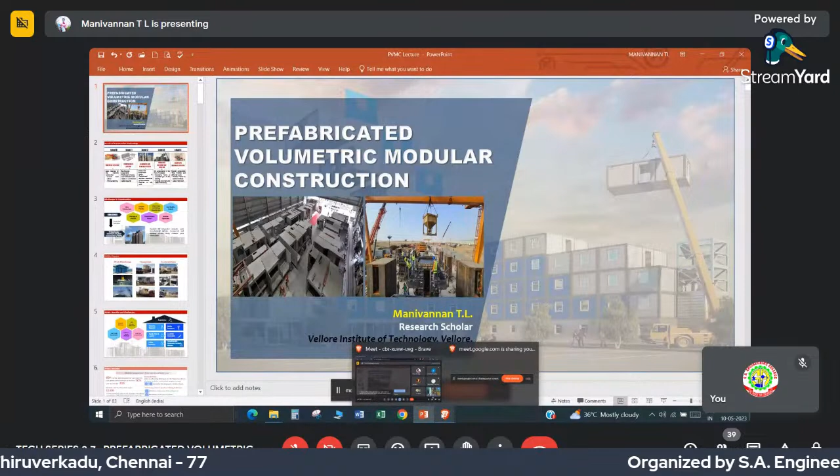So today I'm going to talk about prefabricated volumetric modular construction. To begin with, you can classify construction technology into 5 levels. The first is material system - the conventional construction technology where we bring all materials to the site and build from scratch. Then the component system is the basic prefab system where we just bring beams, columns or slabs and assemble those individual components.

Then there's the element or planar system, where long panel systems and prefabricated systems are adopted - many apartment buildings are built using this technology. The next thing I'll focus on is the modular volumetric system, in which, unlike the element-planar technology where each element is separately brought to site and assembled there, the assembly is manufactured as a whole unit called modules, and those modules are brought to site and assembled. The complete building system is the modular volumetric system.

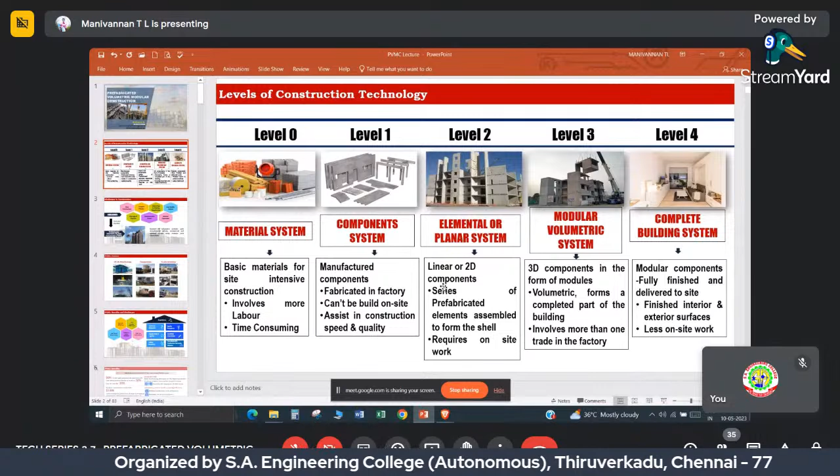There are two ways to do it. One, you can bring it as just a structural component as a module, or the complete building system after implementing all the structural finishes, MEPs, all those things. If you bring out a complete built module system, then it can be classified as a complete building system.

What is the need for this technology? We always have a question when opting for something new - why do we need it? Because there are problems with the old thing. If we talk about conventional construction, building a 10-story building takes months, because for each floor you first build the structural systems - beam, column, slab - wait for it to attain strength, then cast another floor, construct another floor, and then start giving the infill walls.

Also, if you look at quality control and waste material management at site construction, it's a very hectic task. Due to inappropriate quality control, there's a lot of material waste - cement, sand, and nowadays M-sand is also used. All these things are critical, and they also have an environmental impact.

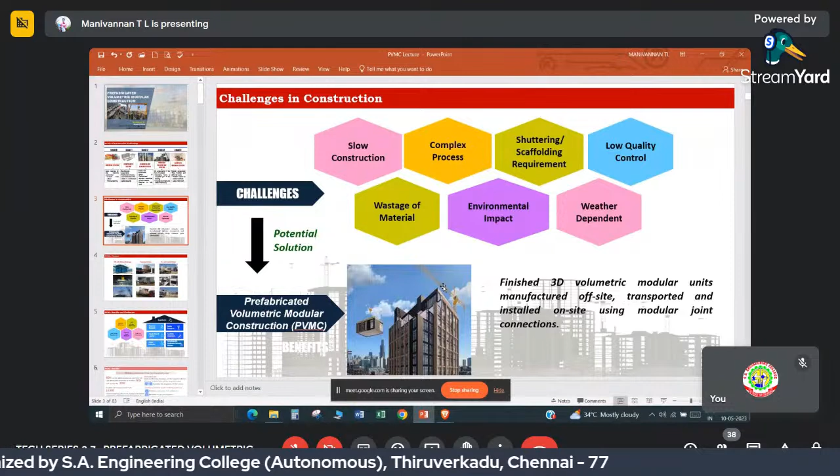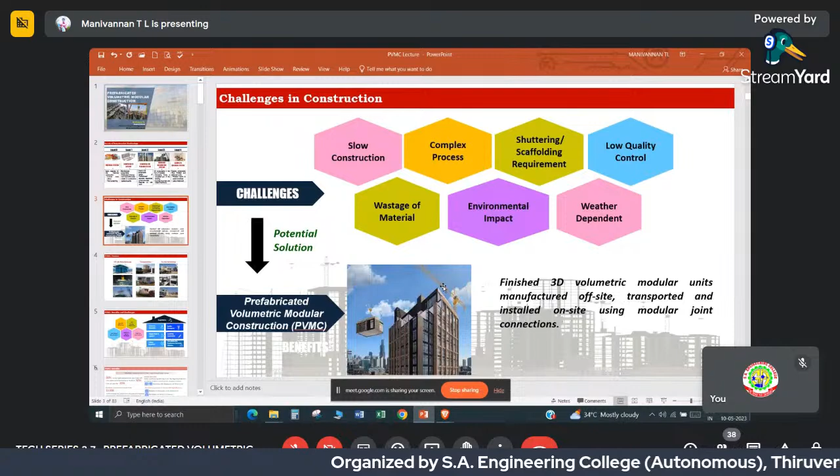So what can be the solution to these challenges in conventional construction? There comes volumetric construction technology. To briefly define it, you can say it is a finished 3D volumetric modular unit manufactured off-site and then transported and installed on-site using modular joint connections. I'll give a brief process of how it's done.

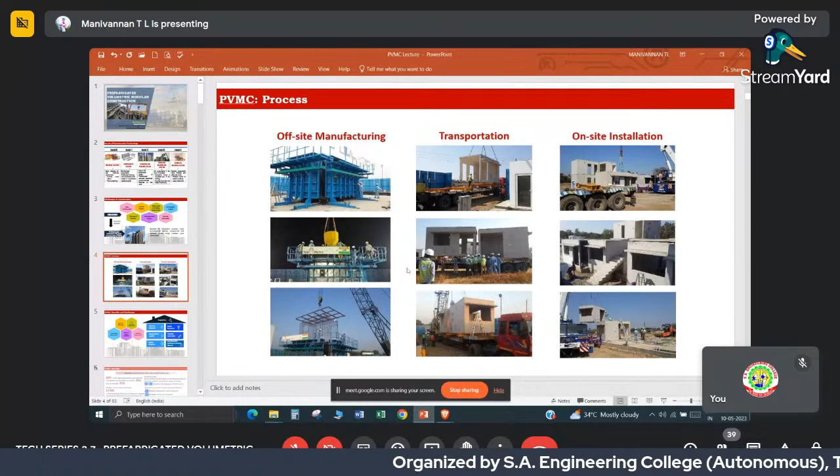If you look at this picture - there will be a shutter kind of mold on 4 sides completely, in which a rebar cage will be inserted as shown here. After implementing the rebar cage in the shutter, concrete is poured and the module is cast. After that, the shutters and scaffoldings are removed after a particular time. Then these cast modules can be transported and installed at the sites.

Now I'll talk about the benefits of this technology. This is very quick construction, very speedy and efficient. Also, looking at the workload on site, there is only assembling, and no other work needs to be done other than assembling these modules at site. Low energy requirement and optimum use of material come under quality control, because these things are done at a factory where everything is properly monitored in a restricted environment, and all material characteristics are very controlled and done with ultimate care.

So it results in optimum use of these materials and makes sure that it reduces the amount of cement wasted, sand wasted, everything. That also has a positive impact on the environment.

But if you look at this technology, there are a few challenges in it, like access to materials. In some cases, when you're going for a larger scale where you need n number of modules at a time, delivering that many modules from a far away place is a little difficult. So what they do is set up a factory kind of thing near the site and manufacture those things there. In such cases, access to materials should be available near that factory that you are planning to set up.

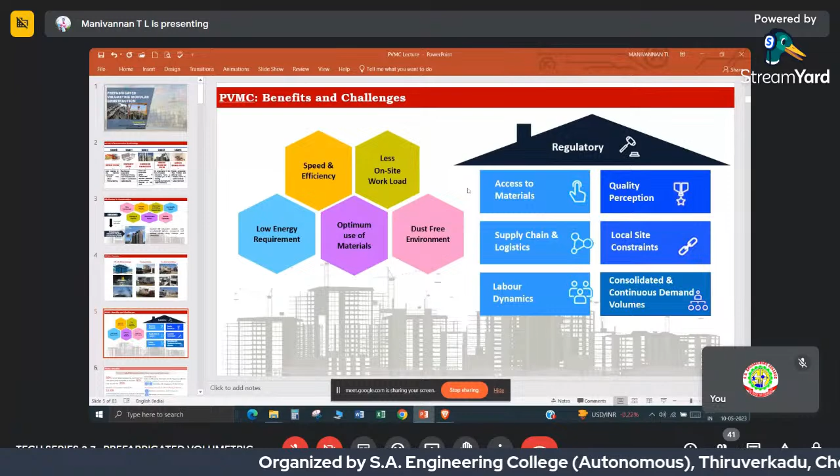Then there's supply chain, labor dynamics, all those things. This volumetric construction requires skilled laborers who are experienced in this technology so they can be involved in the construction part. Also, transport restrictions are there in this technology.

So for the features, it has economy, because per se the construction cost of one module, which is around 5 by 5 meters, will be around 3 lakhs for a completed module. For a house, it will require about 4 to 5 modules for a 600 to 1000 square feet building. So at 3 to 5 lakhs per module, it will be around 20 lakhs for a building.

Then the speed of construction. Once these modules are available at the factory, the time required to assemble them on site is very less, because you can assemble 6 to 10 modules per day. Even for a G+1 kind of building, you can construct a complete building in 2 days. For multi-story apartments and housing, it can be constructed within 2 weeks.

Then about the internal walls. The special thing in modular technology is that it's a 3D monolithic element with no beams or columns. These walls are cast along with the slab, with no other external connections. They are completely monolithic, where the wall completely rests on the slab.

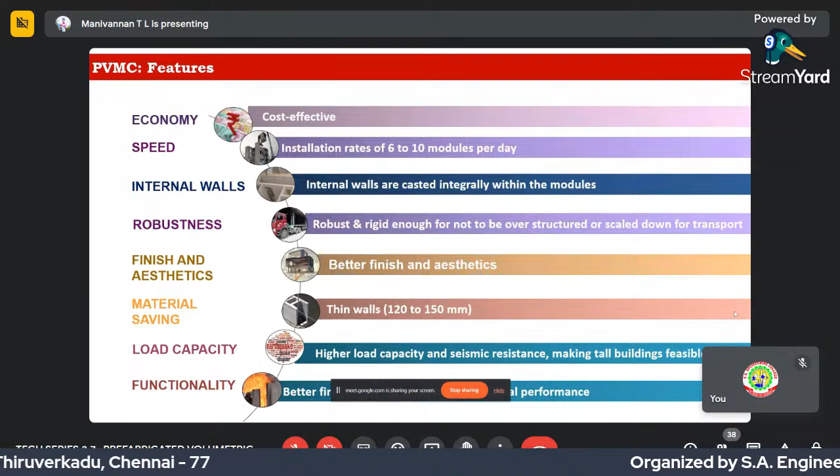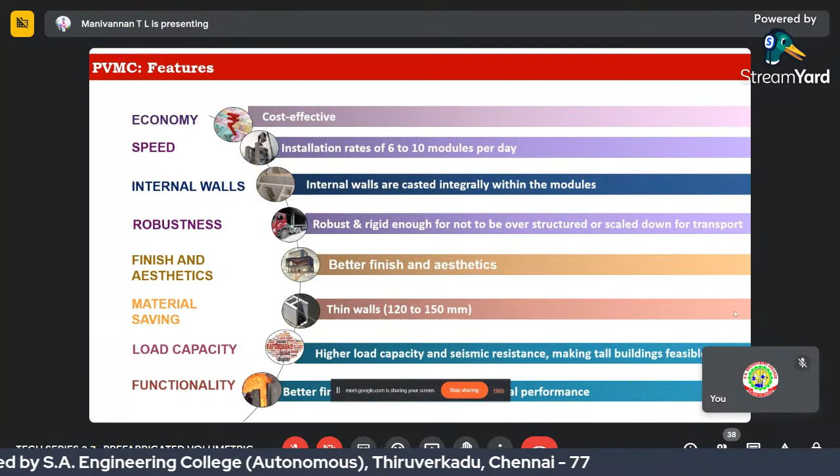Then functionality - in the design of these buildings, fire resistance is given importance in the design of reinforcement. So it has a better performance rate compared to conventional design of reinforcement, where there is less scope for fire resistance.

Regarding the materials currently being used in this technology: aluminum, timber, concrete, and steel. Aluminum is a lightweight material, but its application in concrete components is pretty much limited since the load characteristics of such components are still under study and not yet clearly defined. Timber modules similarly come with a restriction of lesser load capabilities, so they can't be applied for more stories - still only used in low-rise construction.

You could see it abroad, somewhere if you go to some tourist spots - dormitories built for 1 or 2 story buildings, which use these timber modular structures.

The mainly used technology around the world for this is steel and concrete, because these two have better load carrying capabilities. Also, these characteristics have been studied well, we know the properties of these materials better, and lots of previous works have been carried out with these materials. So moving forward, I'm going to explain about concrete modules and about steel modules.

First, getting on with volumetric modular construction with concrete. First, I would like to explain what is a concrete module. As I said before, these modules are a monolithic element. It is a complete system surrounded with 4 sides of scaffolding, and it is casted together, and there are no joints. Monolithic means it is a single structure, so it has no joints in it.

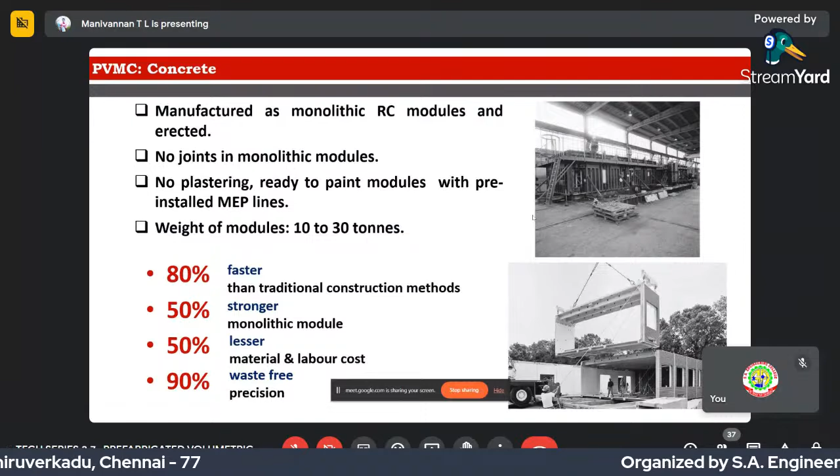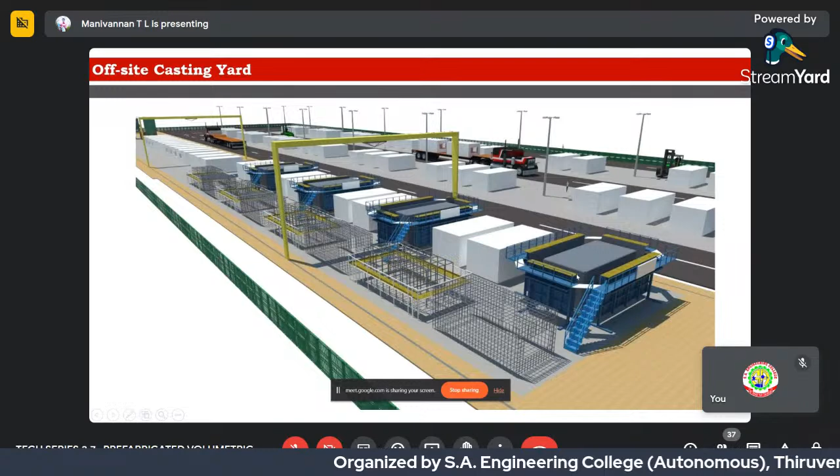If you look at the factory kind of casting, this is a schematic, pictorial view, which is a graphic generator basically, but it represents what you can see at a factory. First, they manufacture these rebar cages, and those rebar cages are installed with MEP lines, and that MEP lines are placed inside this kind of scaffolding, and then the concrete is casted. After the concrete attains its strength, that module is released from the mold, and then it is ready for transportation.

If you look at steel, majorly in volumetric construction, the steel grade used for reinforcement is Fe500, and this mesh is formed by using either welded mesh or conventionally cut and bent reinforcement bars.

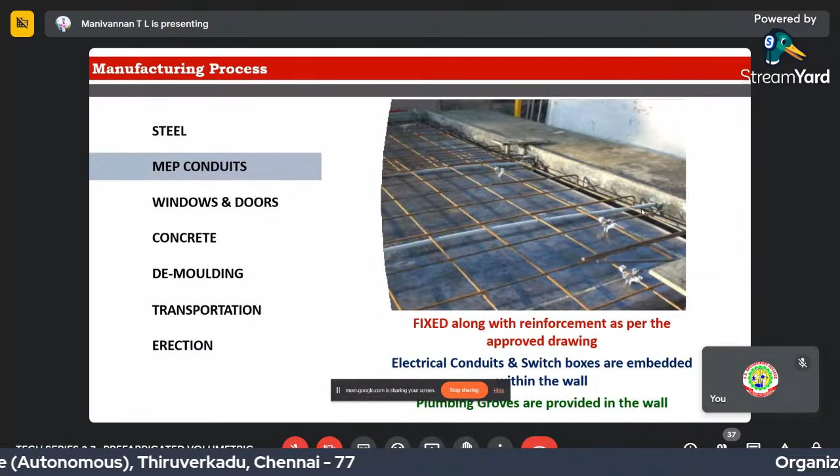Then if you look at these MEP placings along with the rebar cage, for mechanical and electrical provisions, the pipes and all those things are provided along with the rebar cage itself. For the window openings required in a room, those windows and doors openings are provided within the rebar cage like this. These openings will be provided, and the remaining portions will be gauged.

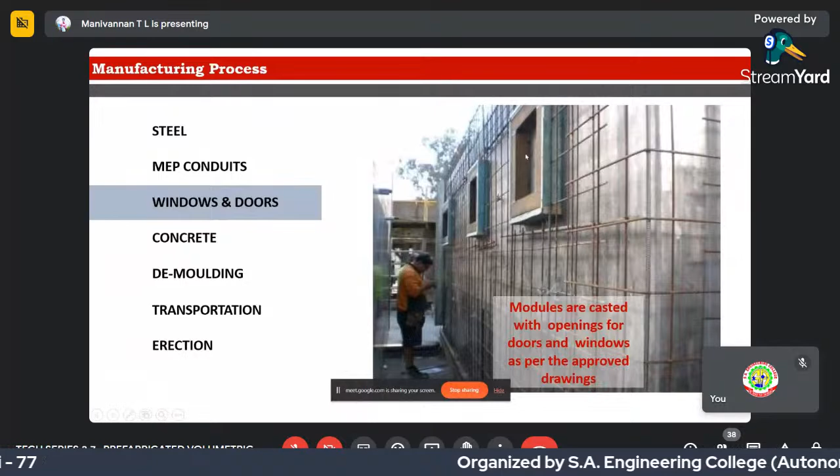Then for concrete grade, since we are going for a high strength module, the minimum concrete grade currently used in construction industries is more than M30 grade, where they go for high strength concrete, and also design it such a way that it has a free flowing rate, because it is a slightly more complex reinforcement cage, so it needs proper finishing.

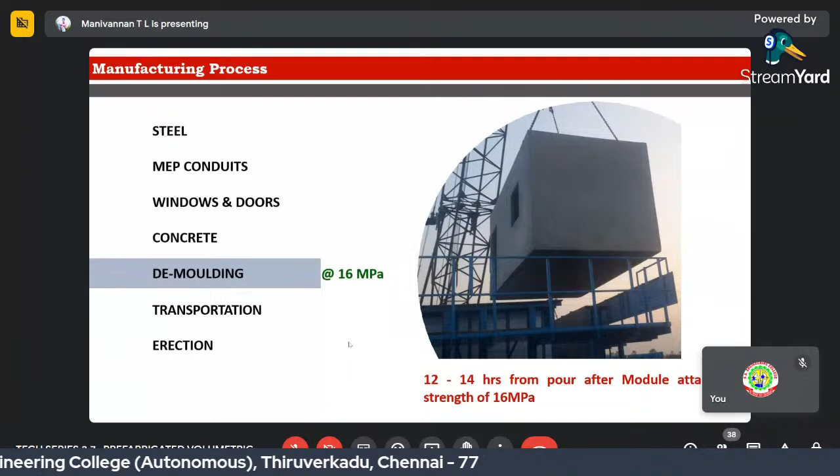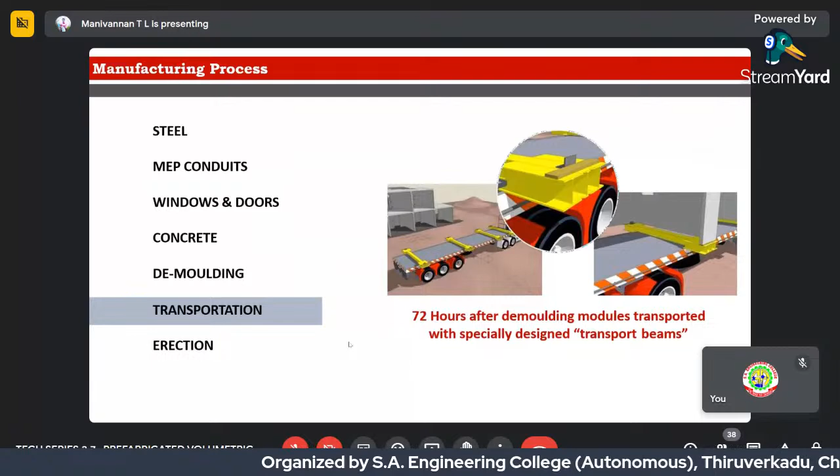After it attains complete strength by these latest curing techniques, the modules will be ready with their complete strength by 72 hours - that is after the complete painting process and the finishing process required for the module. So one module will take about 3 days to manufacture, and it will be ready to be transported.

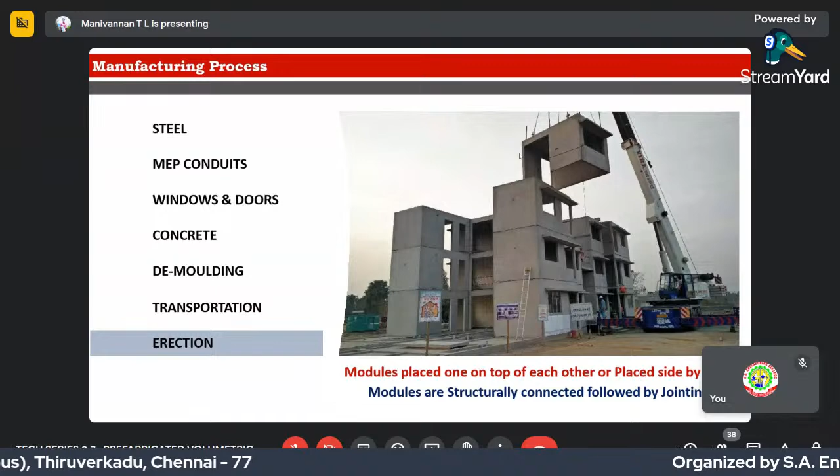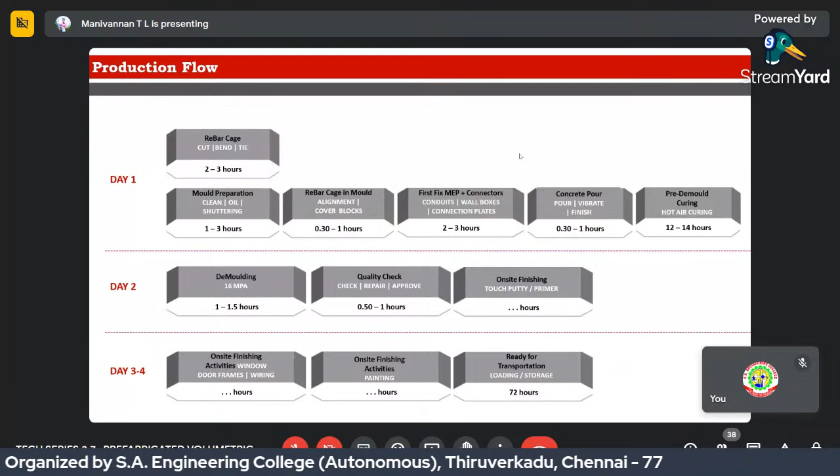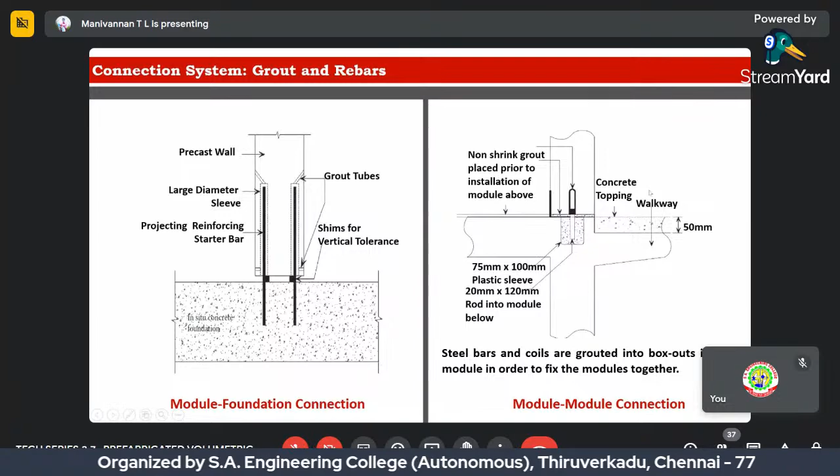So those precast units are placed over that foundation. The first basic ground floor modules will be placed on the foundation elements, and before placing, it will be properly aligned so that the projected rebars go inside and get inserted properly, and the module is aligned and placed onto steel shims to achieve line and level. That will be made sure so that there is no eccentricity between those connections.

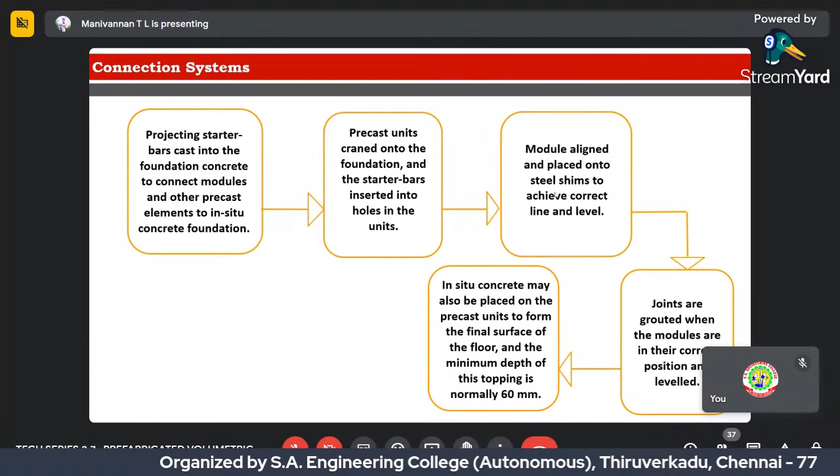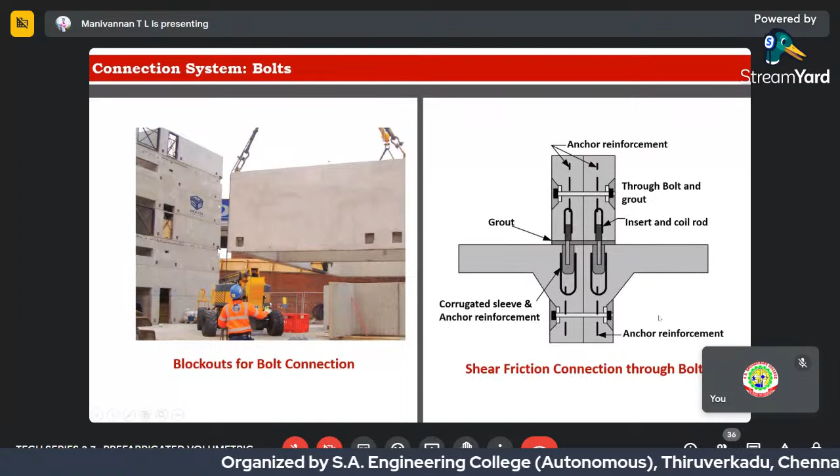Then between one module and another module, it will have a similar kind of connection. On top of one module, it will have a similar projected bar, and on the bottom of another module, there will be coupler kind of holes on which it will be placed and grouted. Also, to increase the stability of these connections, bolts are used, so that when two modules are placed together, it is also connected laterally using these additional bolts, which increases their shear strength. You can look at these pictures where holes and provisions are given, so that bolted connections are worked out outside after they are inserted into the projected rebars.

In this, it's a similar kind of connection, but here they also use a steel plate that attaches together these projected rebars. It gives better stability to these connections. These are just several advancements that have happened in these connection systems.

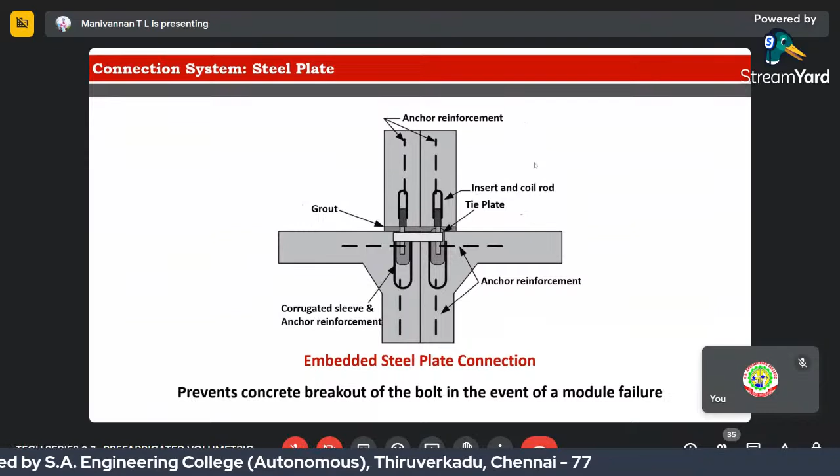If you look at the design considerations made in these concrete modules, basically we follow IS 456 for any design of beam, slab, column, whatever you say. But since this is a monolithic unit, in an actual scenario it requires a building code. The truth is, there is not yet a defined building code that precisely adheres to this technology.

So at present, the practice in the industry is that we follow existing codes for individual concrete elements, like precast floors, structural steel members, reinforcements, all those things. Each element is also designed as wall and slab separately. The Eurocode of 1992, BS 8110, and ACI 318 also discuss the connection systems needed to take care of these loads.

If you look at the Indian codes on precast elements and connection design, they basically talk about beam and column joints. They don't talk about wall-to-wall connections or module-to-module connections, so we go for British standard codes where they talk about modular connections also. So these things are followed together, accumulated together in the design process.

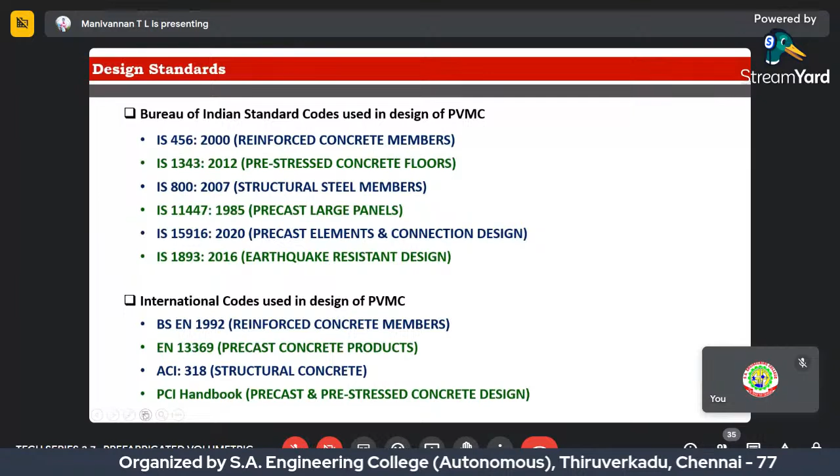If you look at the basic casting requirements, the material strength requirements for this technology, as I said before, we go for a higher strength in this technology. The material strength required is M40 or M50 grade of concrete. And at the stage of demolding, we look for 50% of strength, and then it is demolded.

Also in design considerations, these hooks will be designed, as you can see here. These hooks will also be designed in the reinforcement cage itself, so that it has the capability. Since one module weighs about 10 to 20 tons, these hooks need to be designed properly, so that they have the capacity when lifted by cranes, that they can transfer the force equally among the walls, so that no cracks or stresses occur while transportation takes place.

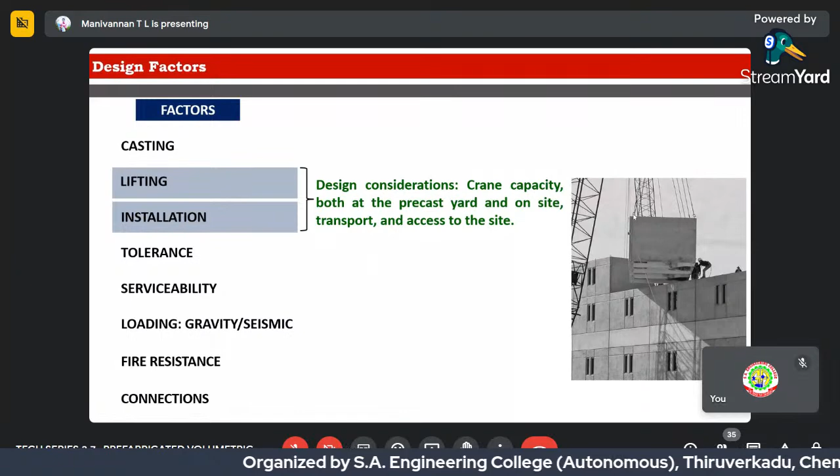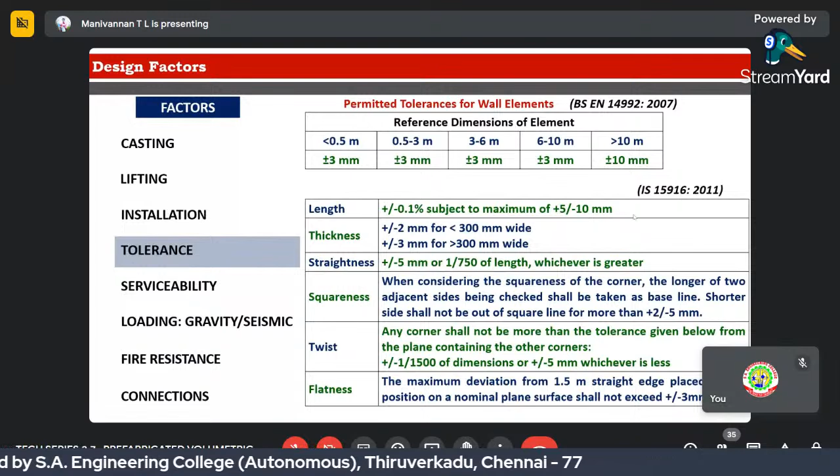And if we look at tolerance, these structural wall elements and slab elements need to have a tolerance of plus or minus 3 mm, because at site, after construction and storage, there can be slight misalignment when they are placed. So for that purpose, these tolerance limits are given. Similarly, for length, straightness, squareness, and twist, how these modules should be, all those tolerance limits for the walls are considered.

It's similar for wall, what should be the length, height, weight, width. This is just to accommodate, so that to make sure even if some difficulties happen at the site while placing these modules, that these modules are capable enough to address those challenges and accommodate it.

If you look at the serviceability factors that we considered, these modules should be designed so that the deflection under service load should be less than L by 250, and the deflection after applying complete finish, for that service load, should be L by 350 or less than 20 mm.

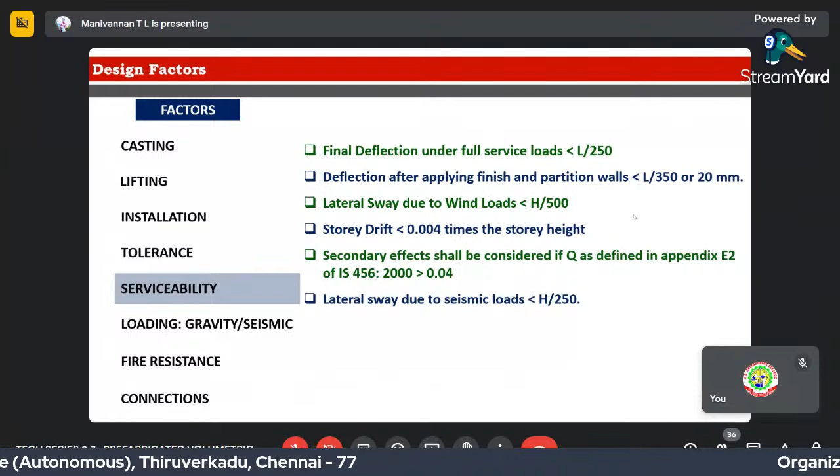And the lateral sway, if you go for higher stories and consider lateral forces, the lateral displacement should be less than the height divided by 500, and the story drift, for lateral forces such as earthquake forces, the drift between one floor to another should be less than 0.004 times the story height.

And lateral sway, as I said before, for seismic loads, for wind loads it is h by 500 specifically, and for seismic and earthquake forces, the lateral sway should be less than height by 250.

The steel bars in the module should have robust joint connections, so that in the critical zone, which in this modular technology is the connection between one module and another module, the shear capabilities and tension capabilities of those connections should be addressed, and adequate reinforcement for that required shear strength should be given.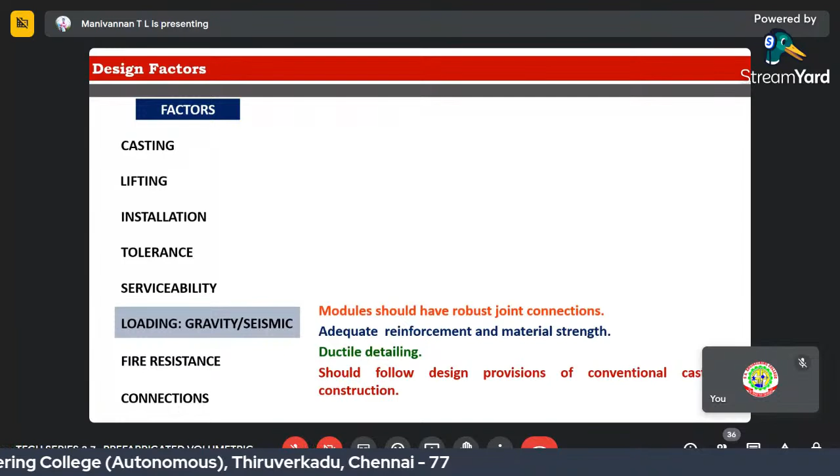Fire resistance is also considered in this design, since we follow the British code standard for this modular technology, which addresses the fire resistance needed for structural elements. This fire resistance R30 is nothing but resistance for 30 minutes, and similarly there's 60 minutes, 90 minutes, and 120 minutes ratings.

Accordingly, the requirement of your structure depends upon the location of the site. If there are adequate fire protection measures available at that location, if a fire happens, then you can have the fire team that will rescue and act along.

If it will be very short, you can go for a 30-minute rating and provide lesser dimensions in the wall element, so it is economical. If it is somewhere in the interior part and requires more time, similarly you need to give provision for that and go for a larger size of structural elements by increasing the thicknesses and slab depths, everything.

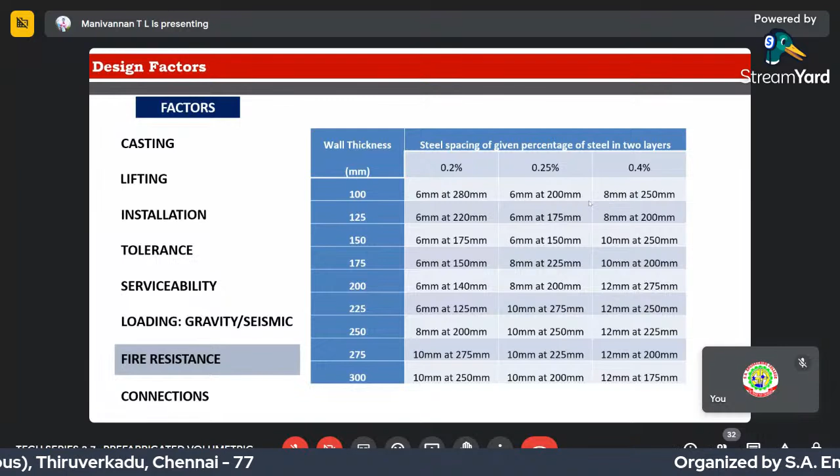This is just a model, like if you consider 0.2% of reinforcement, what will be the reinforcing bars that can be opted for these walls. And similarly, if you go for higher strength, say 0.25% or 0.4% of the concrete area, what will be the reinforcement basically required to design these walls.

And for varying wall thicknesses, these rebar details have been listed out.

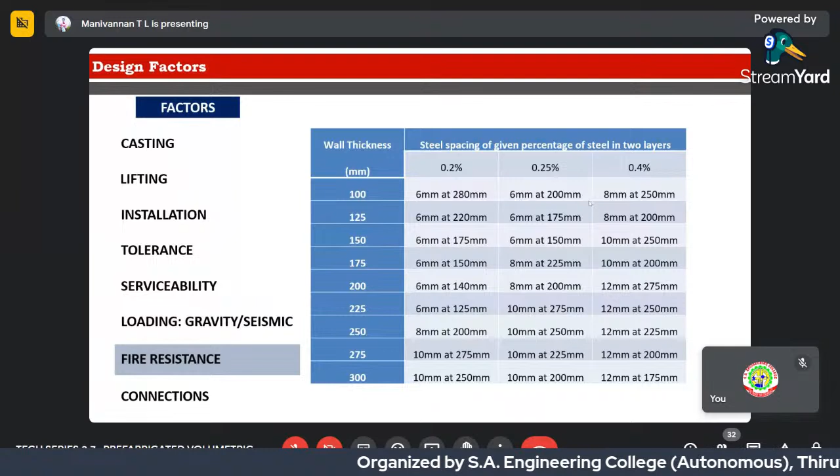And if you look at the connections, as I said before, the vertical joints need to be designed where they only talk about this keyed joint, where they have resistance between shear, which majorly focuses on RJ, which is nothing but the shear capacity of that joint. These are the few code adaptations that we follow in that prefabricated concrete code as per Indian standards.

Similarly, for horizontal joint and vertical joint: the horizontal joint is between one module to another module, between floor to floor, and the vertical joint is module to module between within the floor when you connect two other modules laterally.

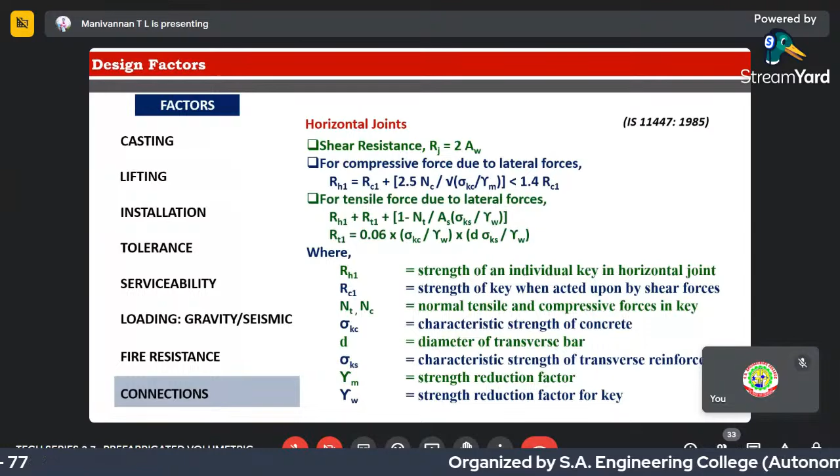And for slab, as I said before, there is no particular standard for this technology, so we go with the conventional standard slab designs that we follow.

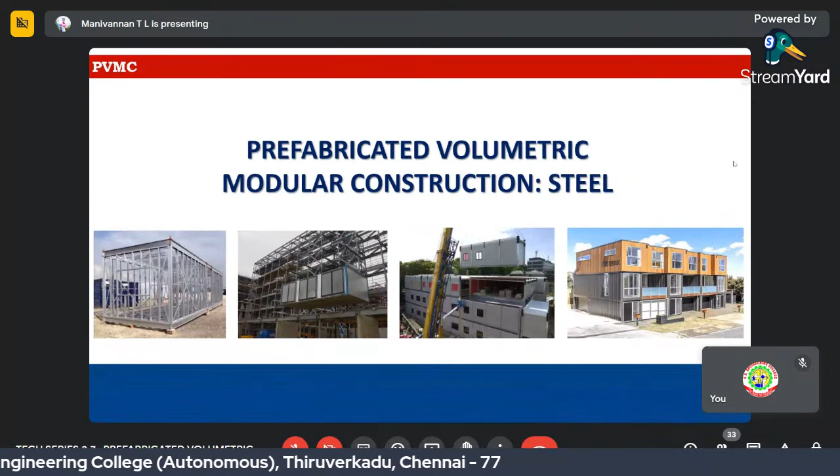So that's about the concrete part. I explained how the manufacturing takes place and also the design standards looked at in it. Now I'm going to go further about steel modules.

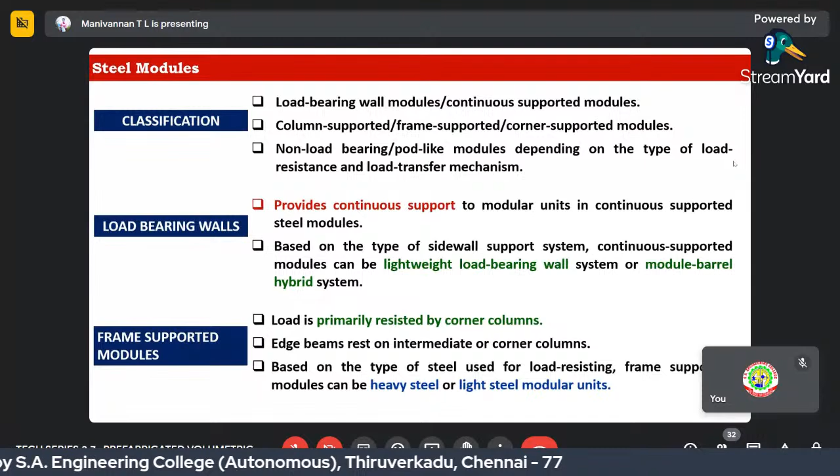The steel modules are classified into three types: load-bearing wall modules, column-supported (frame) modules, and non-load-bearing modules. In load-bearing wall modules, the steel module is completely made with walls, so the load is transferred along the length of the walls. In frame-supported modules, there are columns and beams, and the load is majorly carried by the beams and columns.

This is an example of load-bearing modules. You can see they have continuous steel sections that together form a wall, and the load transfer takes place through it.

And these are the frame type section modules I mentioned, which have only columns and beams, and the loads are majorly taken care of by the columns and beams.

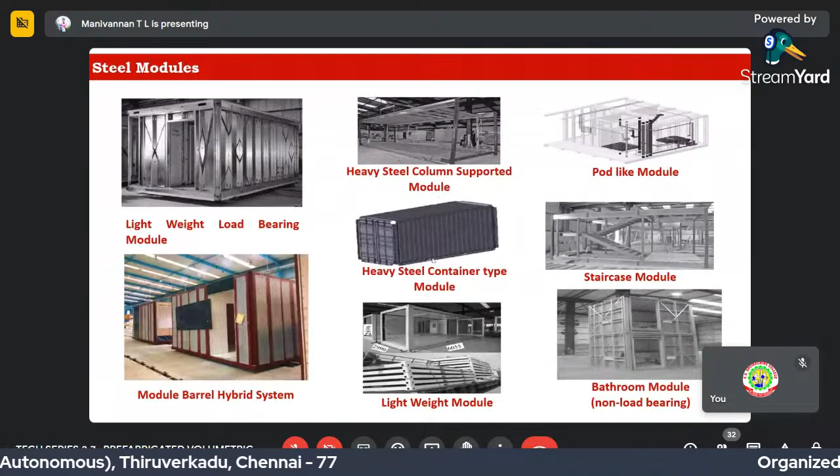This heavy steel container type of module you can see in our places too, like small tea shops or restaurants on the roadside that use these containers. They alter those containers and set up small shops. These containers can take heavy loads, so they can also be incorporated and constructed as a module, since it's similar to a four-sided wall and a slab kind of element.

The staircase and bathroom modules are non-load bearing types, which are not specifically designed to carry load from the structure but are just for provisional purposes. The load bearing capacities of these module structures, the staircase or bathroom modules, are very less.

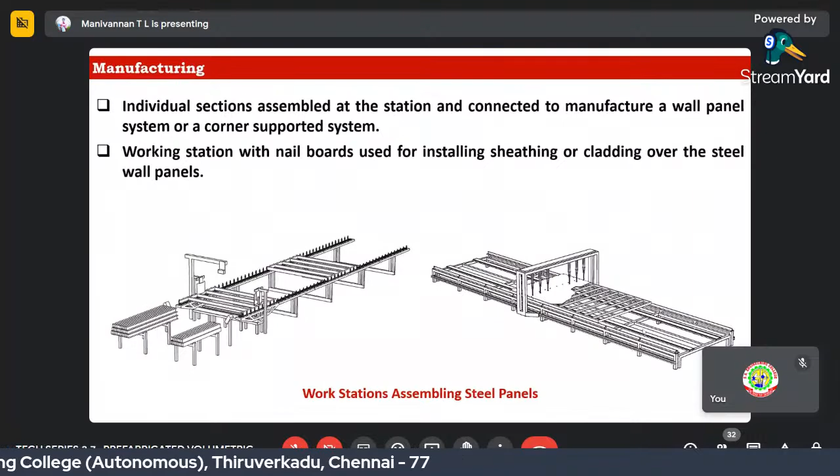Talking about the manufacturing process of steel modules at the factory, these steel modules are not like concrete modules. They have columns, walls, beams, everything, so each element is manufactured separately, and those elements are joined together, and sheets are applied to give a finish, achieving a finished wall element or structural elements.

This shows how these steel elements are used. After getting a steel section kind of structural component on the turning tables, these sheets are assigned to the steel component, and that's how it takes place in the factory.

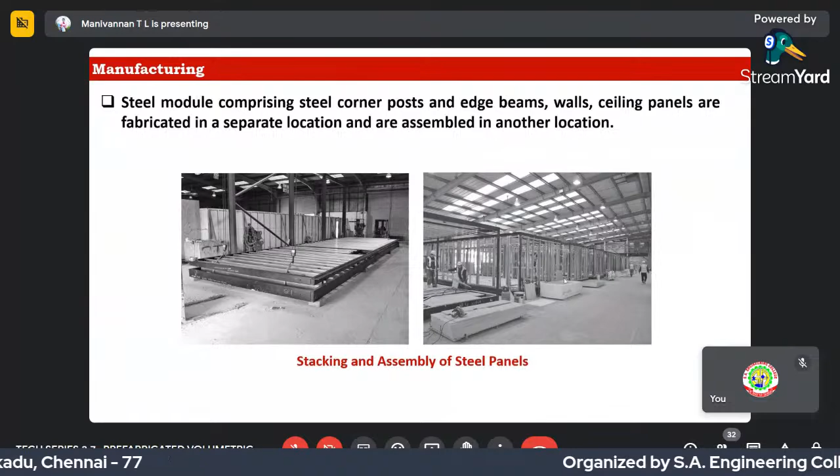Then once each wall element or column-beam element is obtained, these things are stacked together and assembled at the factory, so that it makes a complete module.

The challenge with steel is that it's not structurally stable by itself, since it doesn't have a shear wall kind of reinforcement and heavy strength like a concrete module. Since steel is a lightweight material, it has restrictions for lateral load carrying capacity.

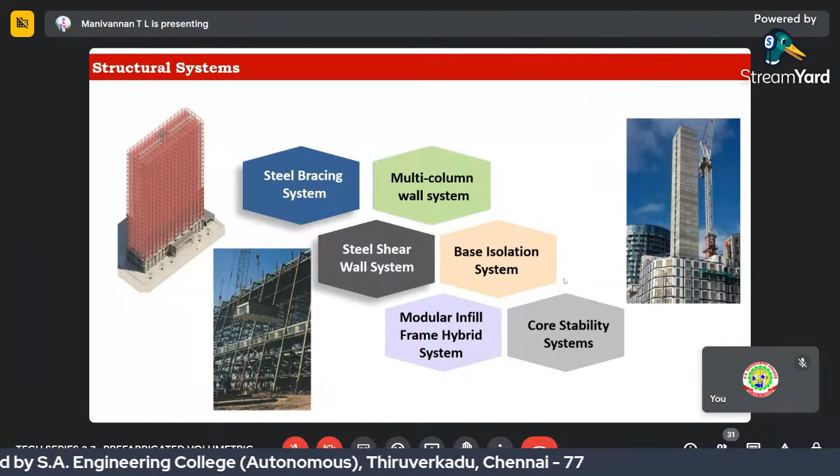So what we go for is the steel bracing system, multi-column wall system, steel shear wall system, base isolation system, modular infill frame hybrid system, and core stability. These are additional structural systems implemented in a steel modular building.

Looking at the bracing system, it's nothing but additional steel sections given from the framed module. Diagonal steel bracings are implemented, which improves the torsional resistance and increases the lateral stability of these modules.

Looking at the multi-column wall system, with just four columns it's a basic module structure, and you go for increased column sections in between the two columns, using sheeting so that it acts as one structure together. These multi-column systems also increase the load carrying capacity and stiffness of these structures.

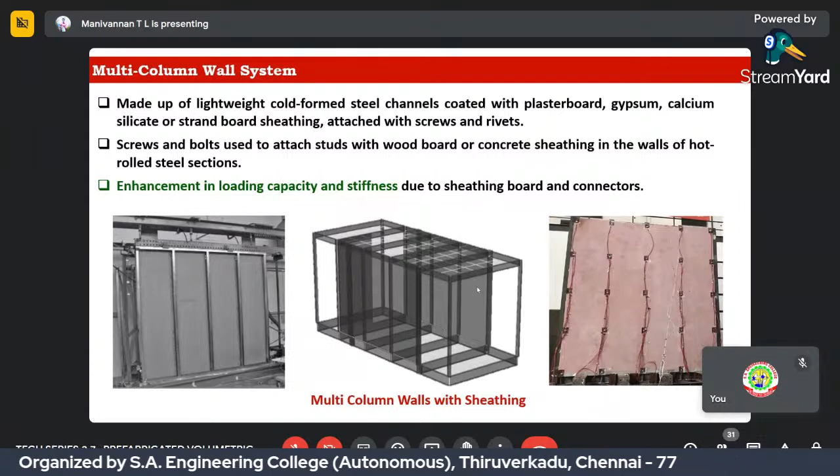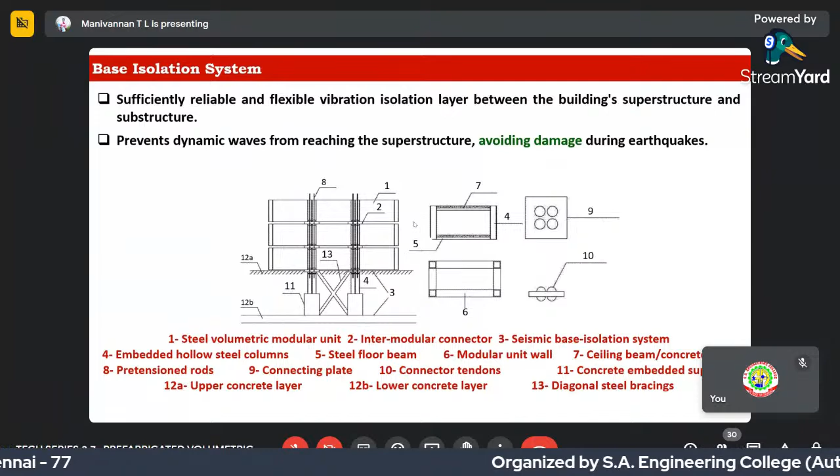Another technology is that either you can make these implementations in the steel module, or you can go for base isolation technology, provided in the foundation, which takes up lateral forces due to seismic activity, controlling the amount of seismic forces and vibrations that go into the superstructure, restricting these things at the foundation level by providing this base isolation system.

Another technology is that since steel modules are a little weak in lateral stability, you can go for a pre-constructed concrete structural system. A beam-column-slab system alone is constructed at site, and then these steel modules are used as infill materials, placed in between those slabs and then connected.

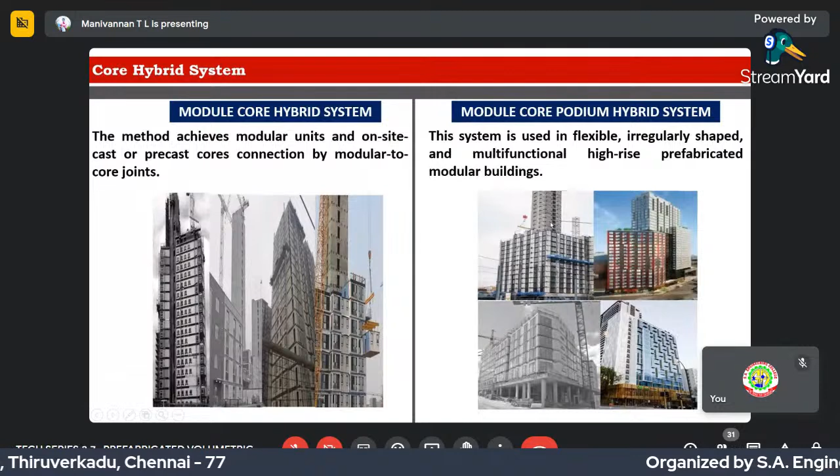Talking about core systems, this is a shear wall kind of structure, similar to a lift structure constructed in conventional concrete buildings. A shear wall concrete core will be constructed, and surrounding that core, steel modules will be attached along with concrete modules. The concrete shear wall structure and steel modules attached to that concrete core give you the complete building, as shown here.

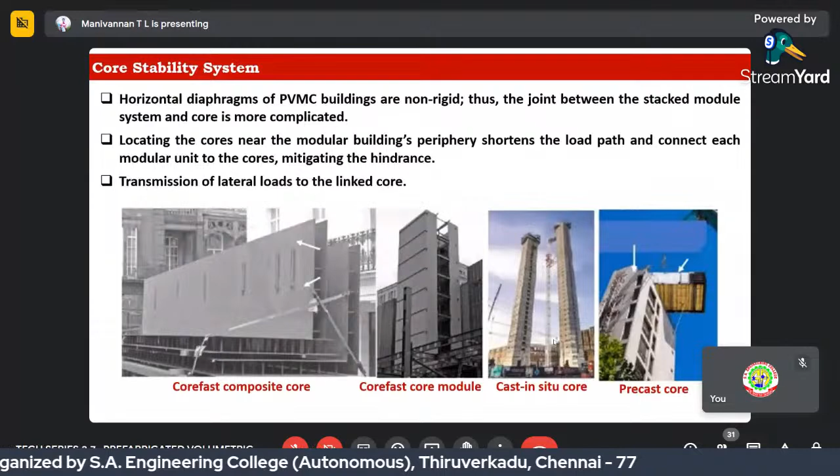Also, shape memory alloys are a relatively new topic, in the nascent stages of research. These shape memory alloys act similarly to dampers, taking up vibration between structural elements in a steel module, so they take the load and have a spring-like property that gets compressed and released when a force, such as an earthquake or other seismic force, takes place in the structure.

These shape memory alloys are at the research stage, and it's a great scope for engineering students who have decided to do a project to look into. Since shape memory alloys have the capability to take care of lateral loads, they are also implemented in Western countries in these steel modules.

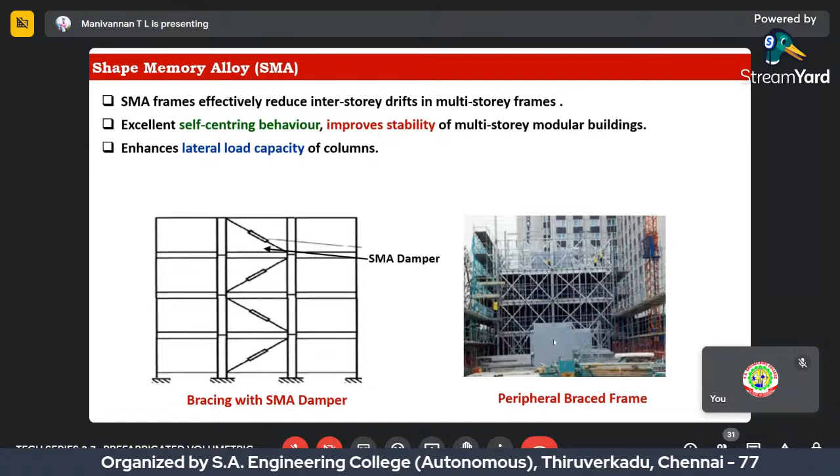Talking about connection systems involved in steel modules: intramodular connection is the connection between column and beams within a module. Intermodular connection is from one module to another. There's also module-to-frame and module-to-foundation connection, as when a beam-column-slab concrete infill system is used, or when modules are connected to a concrete core, and the basic module-to-foundation connections.

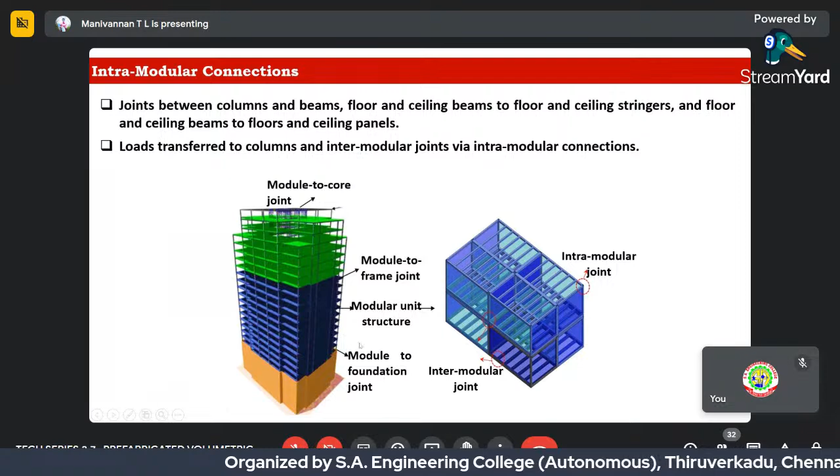You can see these intramodular connections between one column and beam, and intermodule connection where one module connects to another module. Module-to-frame connection is when you have a concrete building with slab, beam, column, and these modules are inserted, with connections coming there, and module-to-foundation connections happen with the foundation - these are the locations where these joints occur in the connection systems.

There are three types of connection systems used in steel modules: tie rod kind of connection system, connector blocks, and bolts, which involve steel plates and plug-in devices.

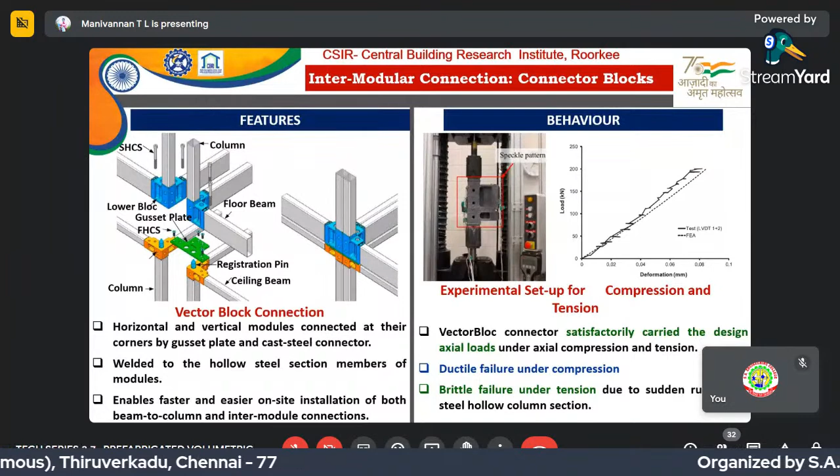Looking at the connector block system, it has a steel section fabricated along with the steel columns, and these sections are placed on top of one another and connected using a bolt kind of system. These connection systems have also been experimentally studied to check their load carrying capacities, and once they meet certain requirements, those connection techniques are implemented in application.

Similarly, there's a bolt kind of connection, where between column to column, a steel plate - a gusset plate kind of thing - is implemented between two columns, and those are bolted from here to between those two columns, with the gusset plate implemented, connecting the column-to-column steel modules.

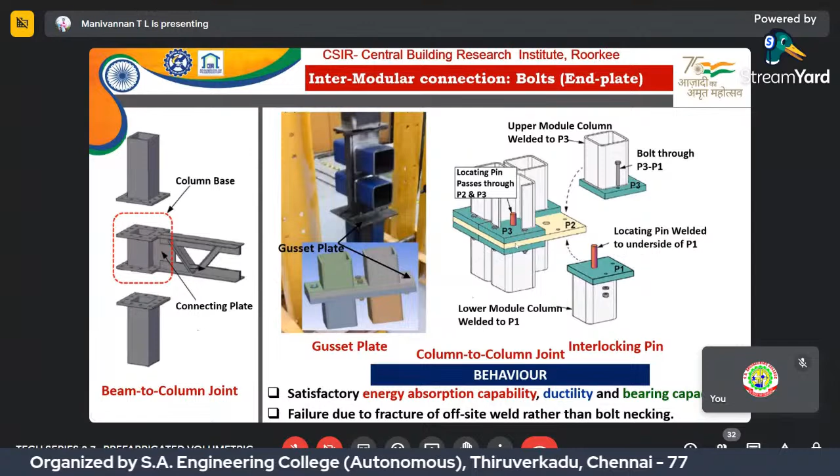I'd like to show you a few examples of steel modular buildings that have already been constructed. This Apex Tower in the UK was constructed in 2017. It is a 29-story structure.

Since it is a high-rise structure, they used steel braced modules. As mentioned before, bracings are used in the module so that it takes care of the lateral load capability. They also built a concrete core structure, and along with it used the steel module, giving connections so it has complete stability against seismic forces and other lateral forces.

Another example is the B2 Tower, constructed in the USA in 2016. It is a 32-story building. It also uses a similar steel braced module, and these modules are stacked upon a concrete podium. After the foundation, for certain floors there is a conventional concrete building, and on top of that, the steel modules are constructed. That concrete building at the lower half of the superstructure is called the concrete podium.

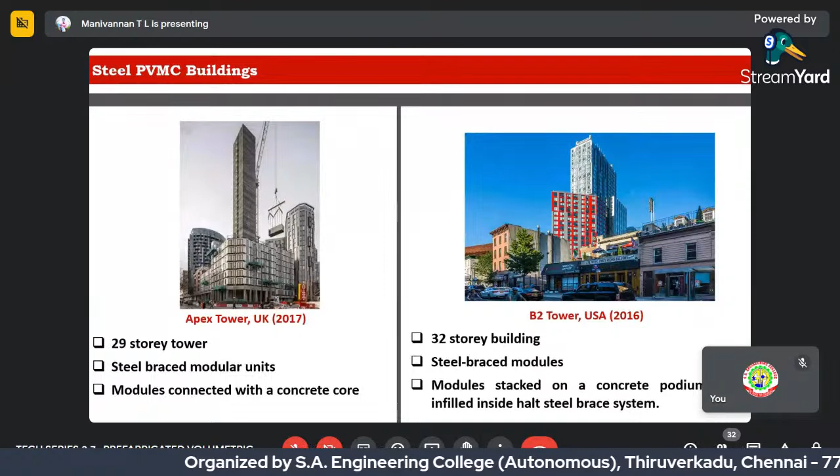It's a similar case with the Ibis apartment, where they used container type steel modules. Similarly, for the lower stories a concrete structure is connected, and on top of that the steel modules are implemented.

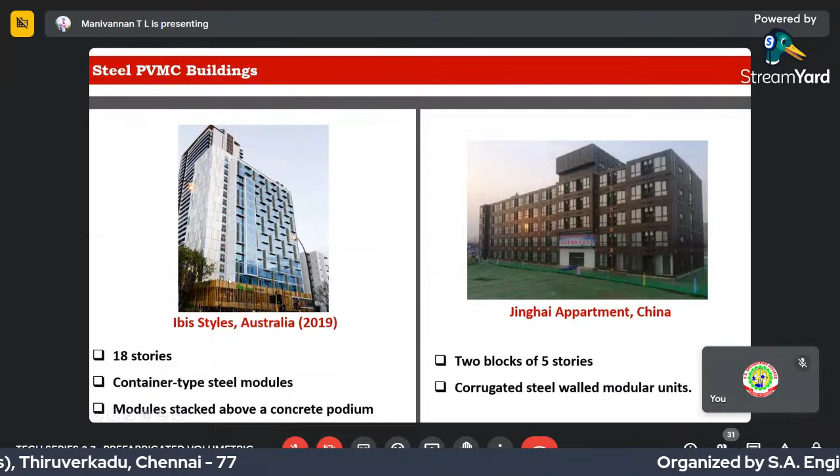With that, I'd like to conclude that this technology is relatively new for us in India. As you could understand, all the examples I showed are from foreign countries, and this technology is at the beginning stage of application in India.

You may have heard about the Lighthouse Project launched by the central government, being constructed at 6 different locations. At one location, Chennai, I remember the Prime Minister came and inaugurated the Lighthouse Project constructed there.

There they used wall panel kind of prefabrication technology. This Lighthouse Project is basically meant to introduce this new prefabrication construction technology, and this particular modular construction is also happening in India now, at Ranchi, where it is under construction.

What I want to say is we study conventional buildings and how they are designed - all those things we study in college are already existing traditional constructions. So students should go ahead and look with self-interest, seeking opportunities to learn about the latest technologies used around the world, so they can gain knowledge that gives them better scope to acquire the latest skills required to get a job.

I hope this topic creates some interest among students, so they also go and study about these technologies and improve their skills. With that, I conclude, and I'd like to thank everyone once again for giving me this opportunity to present. Thank you, everyone.

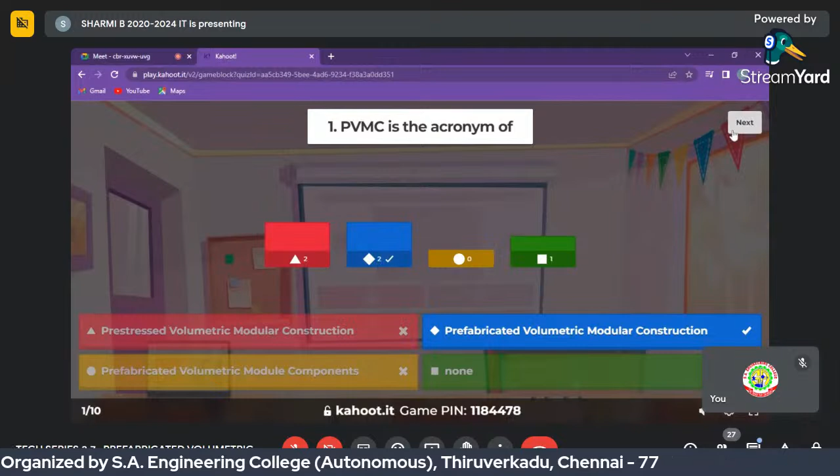Three, two, one. Time's up. Two members answered correctly. Vidya is in the first position with a score of 755. We will move to the next question.

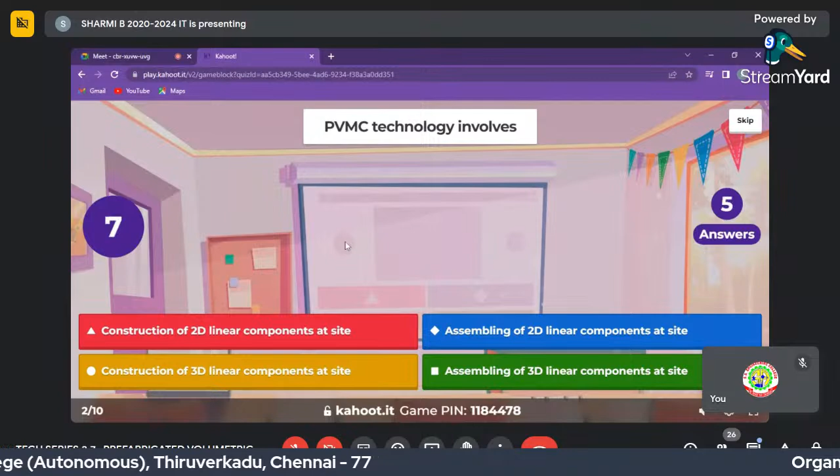PVMC technology involves: construction of 2D linear components at site, assembling of 2D linear components at site, construction of 3D linear components at site, or assembling of 3D linear components at site. Time's up. Five members answered correctly. Shall we move to the next one? R is in the first position with a score of 1608.

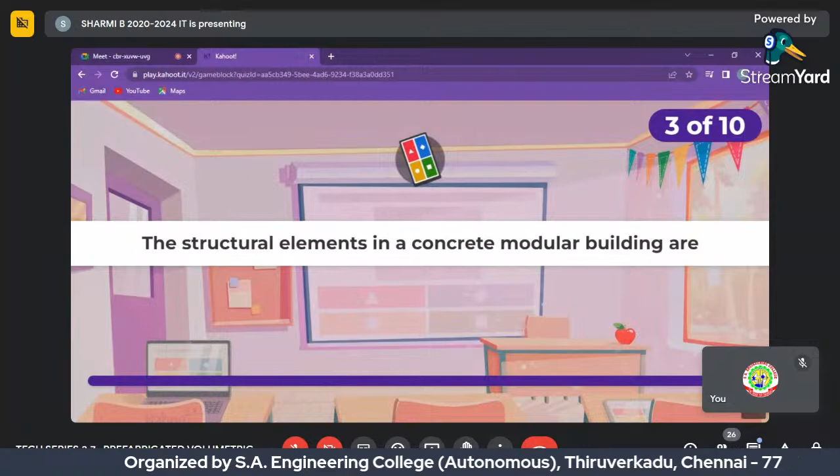The structural elements in a concrete modular building are: beam, column, slab; column, wall, slab; wall, slab; or option D is none. This is a very easy question.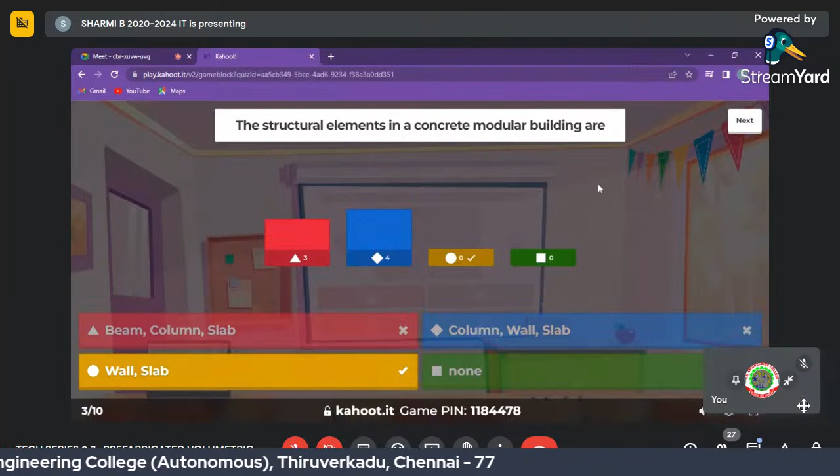9 seconds left. 8, 7, 6, 5, 4, 1. The correct answer is wall, slab. We will move to the next one. Again, R is in the first position.

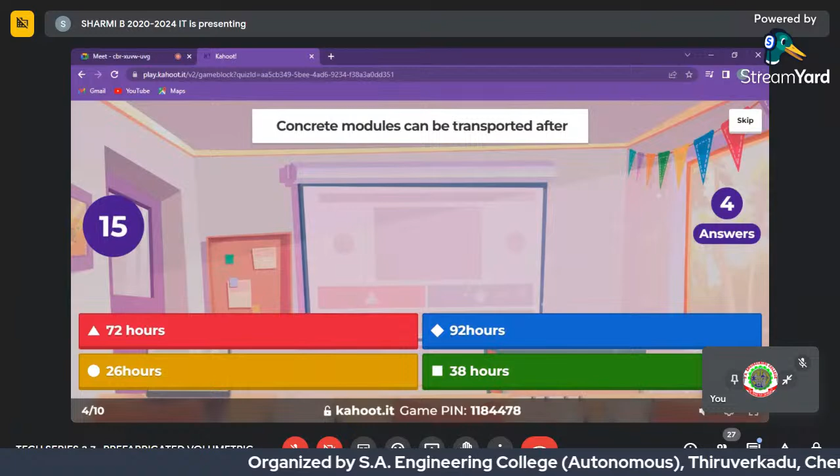Concrete modules can be transported after 72 hours, 92 hours, 26 hours, or 38 hours. I will repeat the question: concrete modules can be transported after 72 hours, 92 hours, 26 hours, and 38 hours. Time's up. Two members answered correctly.

Vidya is in the first position with a score of 2011.

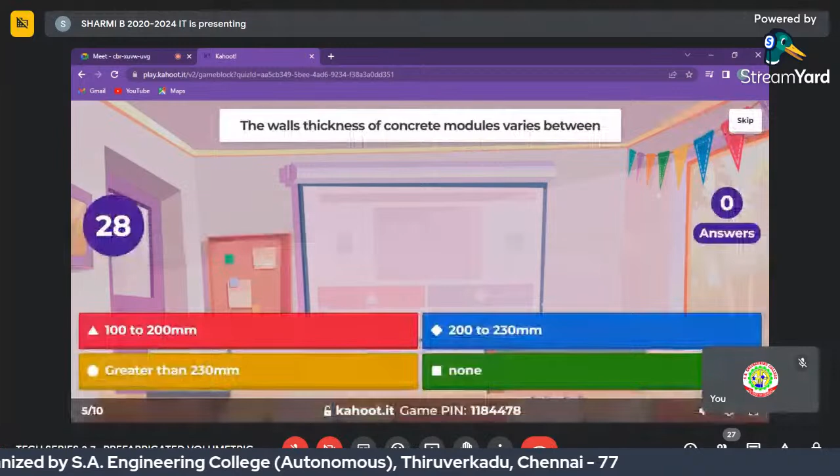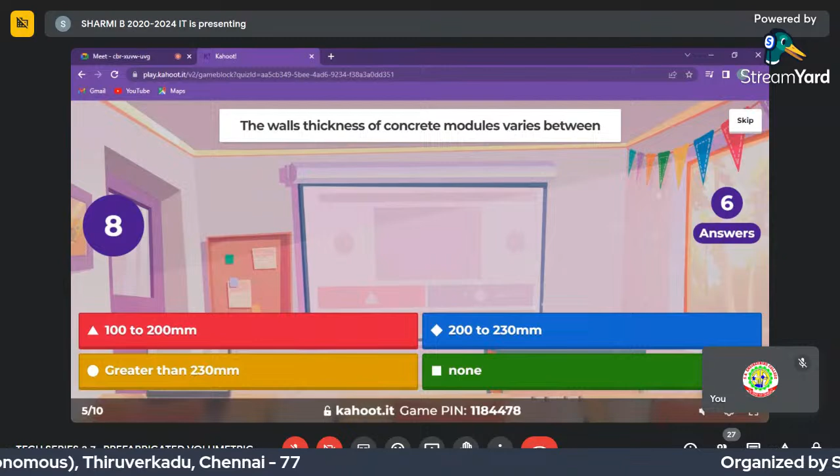The wall thickness of concrete modules varies between 100 to 200 millimeter, 200 to 230 millimeter, greater than 230 millimeter, and none. 6 seconds only left. 4, 3, 2, 1. Two members answered correctly. Now R is in the first position with a score of 2559.

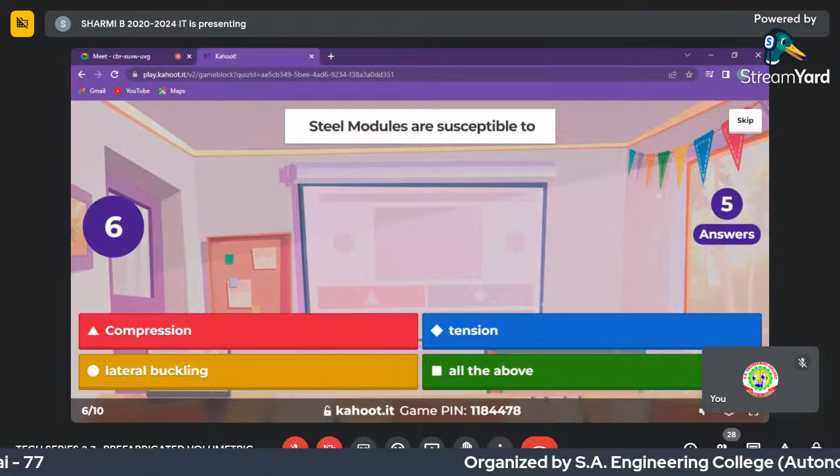Steel modules are susceptible to compression, tension, lateral buckling, or all of the above. I repeat the question: steel modules are susceptible to compression, tension, lateral buckling, all of the above. 6 seconds only left. 3, 2, 1. One member only answered correctly. Now R is in the first position with a score of 2559.

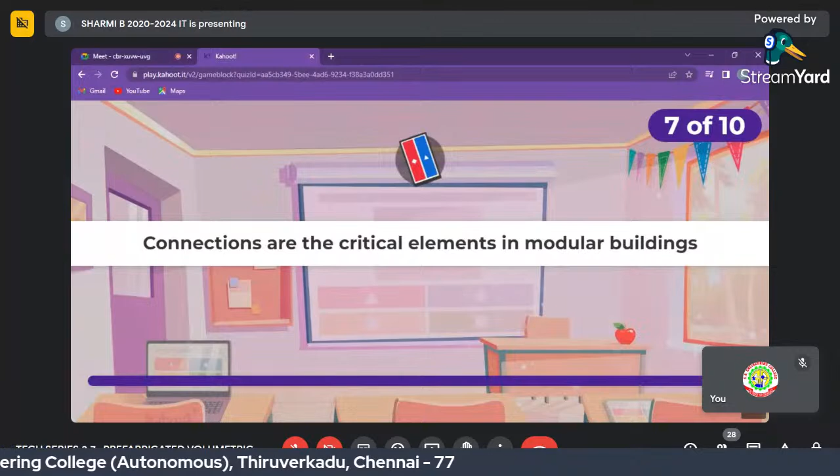Connections are the critical elements in modular buildings. This is a true or false question. I repeat the question: connections are the critical elements in modular buildings. Your options are true or false. 10 seconds only left. Come on, guys. Five members answered correctly. Again, R is in the first position with a score of 3433.

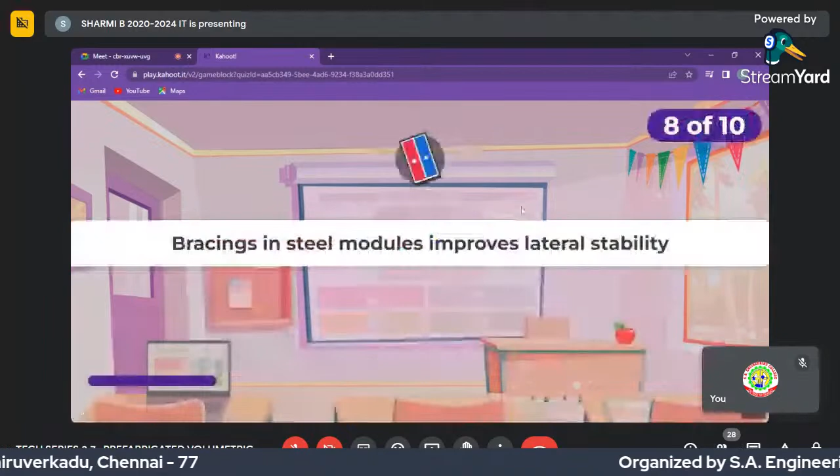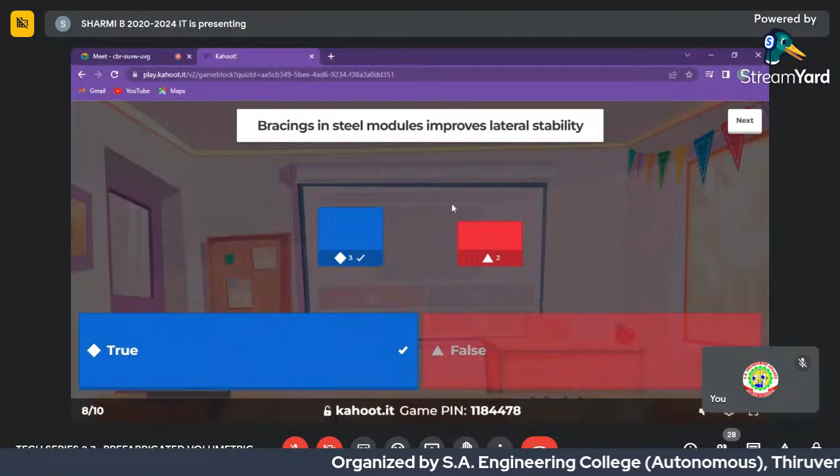Shall we move to the next one? Bracing in steel modules improves lateral stability. Again, it is a true or false question. I repeat: bracing in steel modules improves lateral stability. Your options are true or false. 9 seconds are left. Come on, guys. Three members answered correctly. Now Vidya is in the first position with a score of 3665.

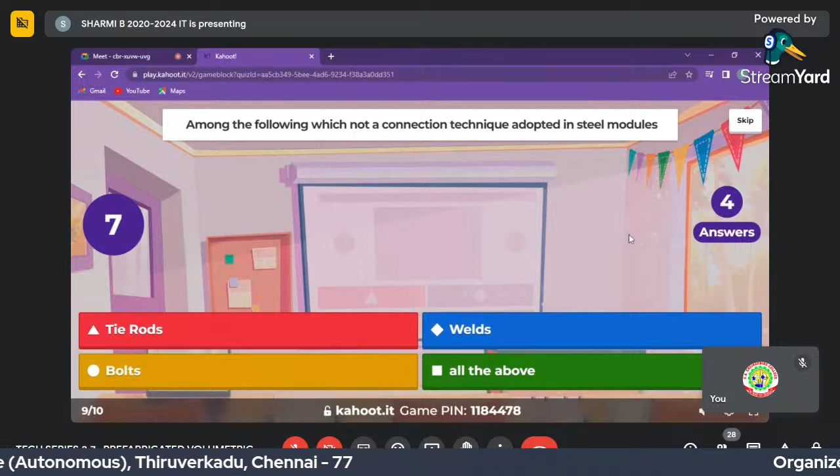We will move to the next one. Among the following, which is not a connection technique adopted in steel modules? Tie rods, welds, bolts, or all of the above. Two answers came, three answers, four, and your time is left. Only 1 second more. One member only answered correctly. Vidya is in the first position with a score of 3665.

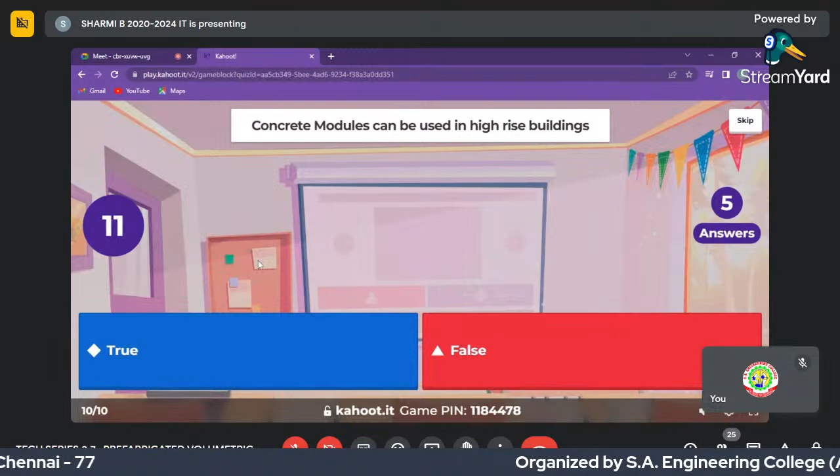Your last question: concrete modules can be used in high-rise buildings. Again, it is a true or false question. I repeat: concrete modules can be used in high-rise buildings. Four answers are there. Remaining people, 10 seconds left. 5, 4, 3, 2, 1. Two members answered correctly.

Next, we move to the podium. The third prize is Vidya. The second prize is Har. And the first one is Imrash with a score of 4372. Thank you, guys.